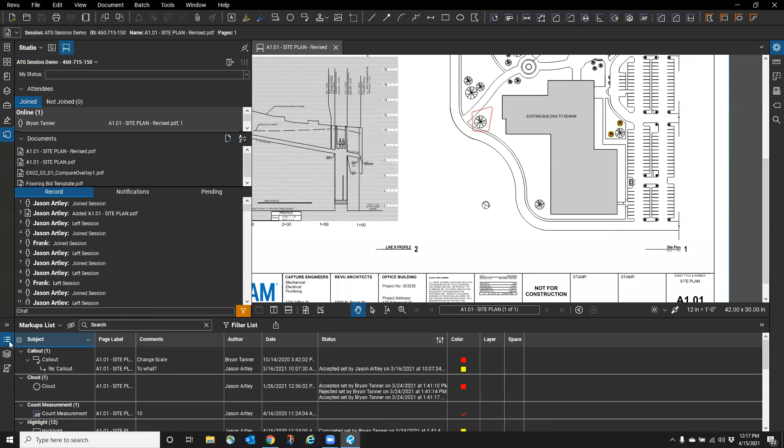For those that have been using Bluebeam for some time, they know that we store markups inside the PDF. That's one of the biggest selling points of Bluebeam in general. You open a PDF, you mark it up, you store it on the server. Somebody else opens up the same PDF on the server, they mark it up as well, and we get to approve and update all the statuses and changes throughout the lifespan of that PDF representation before the next phase of deliverables to our client. We may have a 30% PDF that got marked up, we make all the changes, we submit a 60% PDF, and then we go through another round of markups for that. So obviously that's one of the larger selling points of Bluebeam.

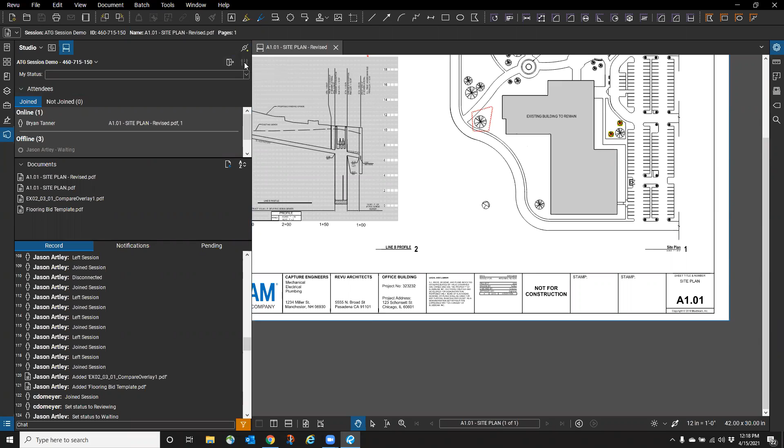We have those same options inside of Bluebeam Studio, but we also have this running record of actions inside the session. So that's just a quick intro to what we expect to see inside the studio session, the documents that have been uploaded, the record of activity inside of there. And if you're no longer participating in that studio session, we can just leave the session. Note that there's a setting right here, session settings, that is currently not highlighted in this ATG session demo because it has expired. Nobody can edit this any longer. I'm not the owner of it, so I can't modify or reopen this studio session.

I'm just a participant, so I'm going to leave the session. I'm out of it now, but I'm still inside of Bluebeam Studio. I'm still logged in. I can still participate in other sessions, and I'm going to add one and ask those following along to please join. So I'm going to click and create a new session. When I create the new session and we see the session code down here, I'm going to ask you to not create a new session, but click the plus sign and join a session.

So I'm going to create a new session. Give me just a moment to talk through what we do when we create a session, and then you'll be able to join it. I'm going to call this my ESD example session. I don't have any files open, but if I did have some PDFs open inside of Bluebeam, I would have the option of adding those files to the session I'm creating. Because I don't have any, I'm going to click the add button, and I've got a good expanded data set here.

That's actually a 3D file that I want to use, and there was a practice file from what Michael did last week. So I'm just adding a few files to this session. What files are uploaded to a session are the only files that the participants have the ability to access. The owner of the session can allow other people to add documents, but I'm going to leave that restricted. I'm going to say the documents that are loaded are the only documents that are available for markup. That's the only thing people have the ability to access while working in this session.

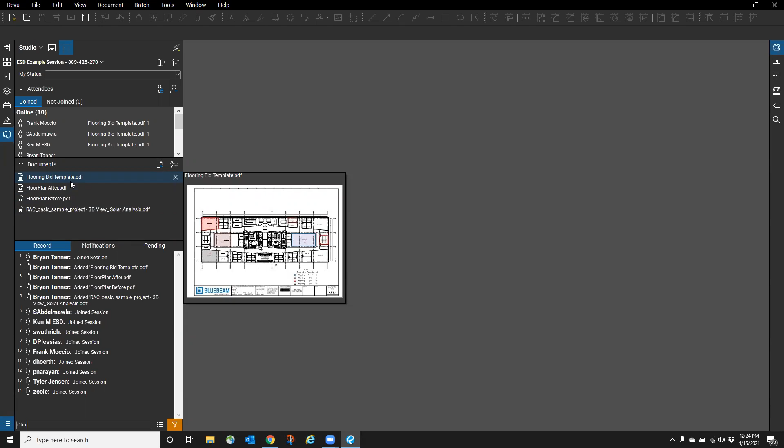One possibility is the unfortunate circumstance that somebody became ill and is out for a couple weeks, or leaves the organization and they were the administrator. You can still download a report, capture all the markups that took place as part of the session, and create a new session. The markup list is still retained, the records are still retained. So it would require a new session to be created with a new administrator, but I don't believe you can have multiple owners. We can set permissions so everybody else has administrative level permissions, but they would never be the ultimate owner of that information.

So we've got a few documents here. I know people are looking at a variety of those things and maybe even tinkering around with a couple markups—some moved images, some very basic stuff, and that's okay. Feel free to make some markups. I don't mind the markup list expanding a little bit while we go through this.

I did see a question about when I hover over a name in the record window, it only shows the detail box for about 1 second. Can I make that longer? I think if you keep your mouse completely still, you'll see that detail for a little bit longer. I'm literally letting go of my mouse to make sure there's not even the slightest change to what I'm touching when hovering over those.

Yeah, I tried that too, and it doesn't work. It's always been an issue. Every time I put my arrow on a name, it pops up for about half a second and it's gone. I'm like, oh, what time was he there? I can't tell. It's always been an issue of mine.

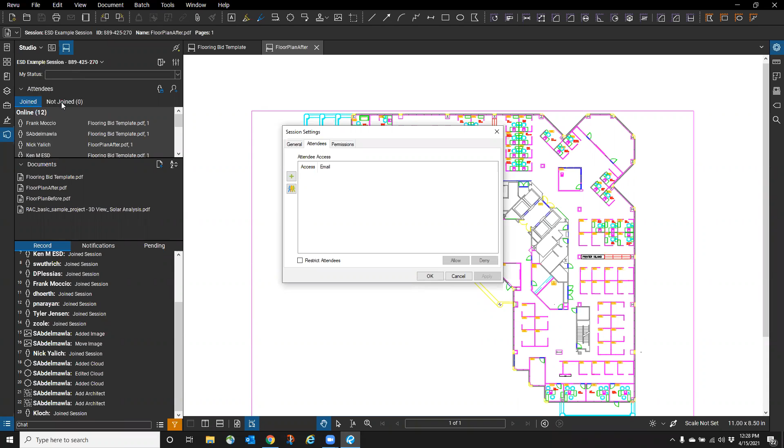But again, we can invite individual people via their email address, or invite groups of individuals—slightly different interface than when we initially created the session. This is the session settings after the session's been created. We can alter the permissions; all attendees or groups of attendees can be given different permissions within it. Again, I chose not to allow anybody to add additional documents.

I can give another attendee full control. So again, I'm still going to be the owner, still the host of the session. But if I left the company, as long as I assign somebody else full control, they have the ability to pull the reports, create the record documents, and do things of that nature as a basis of this.

So as long as one other person has this full control aspect, then you're effectively co-owners. It's just that obviously that other individual is not determined as an owner from the terminology standpoint of Bluebeam.

I'm going to go ahead and cancel out of there and not apply any of those changes. We'll look at some of the changes that may have been made. Add a rectangle. Note, whenever I click on somebody's markup or somebody's activity, it doesn't just allow me to get those details, but it'll take me right to the markup. Okay, so we've got the 3D model there.

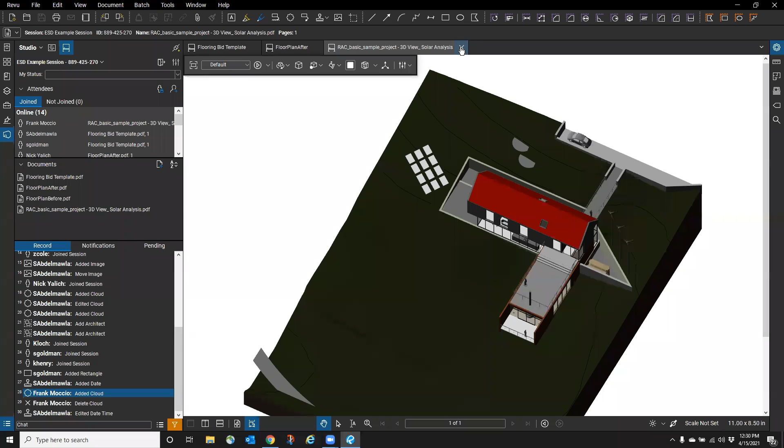I'm going to go ahead and close out of that. That's going to be the one file that I try to stay out of until I'm ready to go into it, because whenever we've got a 3D PDF, it can sometimes bog down our display drivers and things of that nature. I don't want to get into a slowdown while we're on the session today. That will tend to be the only PDF that I have open at a time if it's a 3D PDF, and we'll talk more about that later.

But we can jump directly to that markup. We don't have to open up the markups list. We don't have to figure out which PDF we should be looking at. Hey, if somebody added an architect, boom, I can go to that file. I know which file it is because it opened it right up. I can go to the markups list and find, oh, hey, there's the markup. I can actually right click and set the status to whether I accepted, rejected, or completed that task.

If we needed to add the architect to, maybe it was a title block piece of information that needed to be included as the person working on the project, maybe I added that architect, or maybe it was a note to the architect. And if I address that issue, I could right click and set the status to complete.

If I was the project manager and we had a phased approach to this, where anybody could make suggestions, anybody could make markups, but it required the project manager's seal of approval, basically, to say yes, we are accepting these changes, I could come through as the project manager and either right click and set status or double click. Either one works, and I can say that yes, this markup is accepted. Whoever's working on this project has my approval to actually work through to a level of completion.

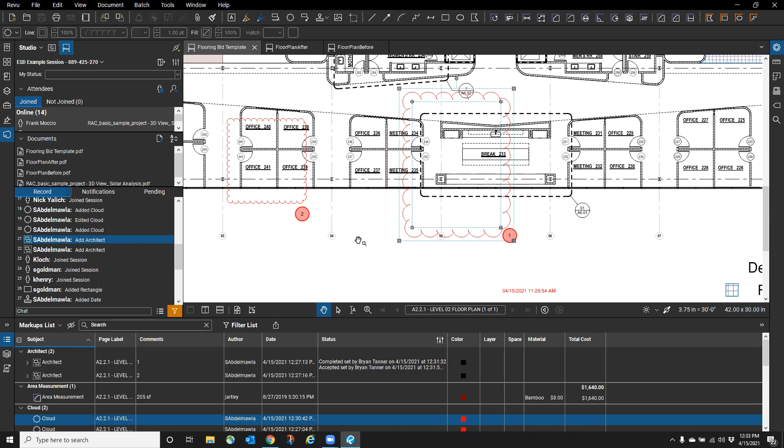With that same thing in mind, we've got the markup tools that each individual uses. Our client or our contractor may not have the same tools that we have, but as part of the ESD team or the profiles that we have loaded, we have our tool chests. And whatever you have stored in My Tools, or maybe you have a custom ESD tools panel within your tool chest, those are available to you in sessions, just like they are in regular old Bluebeam.

Now, will the other people, the clients and the contractors, have access to those markup tools? No, they'll have access to their own My Tools or their own personalized tool chest. The nice thing is, if a recent tool is used, it's saved. But note that other folks are using tools and markups within this document.

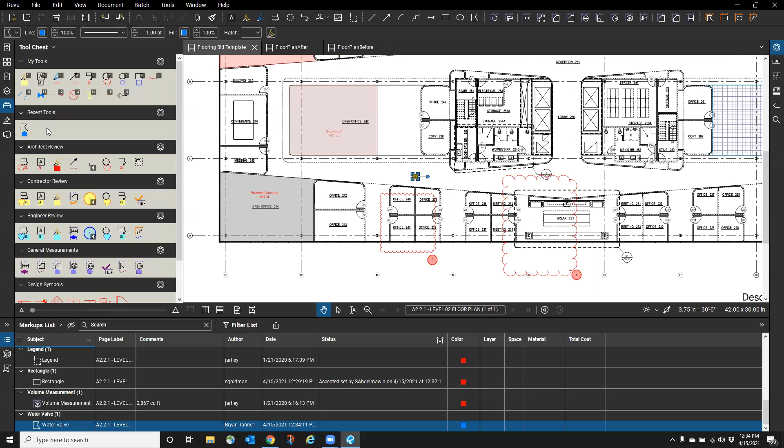It's going to be loaded as a recent tool for them, but it is not loaded as a recent tool for me. So your recent tools are your recent tools. Not only do you own the markup, but Bluebeam recognizes that it is your markup and it's your recent tool used. I wouldn't have any recent tools used until I placed one, and then it becomes my recent tool, and nobody else should see that in their own recent tools list.

Because I created that markup, I have the ability to delete it. And because I deleted it, it's gone, it's out of the markup list. So as the author of a markup, you have the ability to delete that markup, but you're the owner of it. Nobody else can manipulate it, nobody else can delete it. Once the markup is deleted, it is gone. Nobody else can change or accept or modify the status. It's gone from the markup list.

That said, once the session closes, nobody but the owner has the ability to pull a report, or the administrator, whoever has administrative access. Nobody else has the ability to make those changes. So once the session's closed, you can't go back and artificially delete your markup because you want to tell somebody, oh, I didn't mark that up. No, it's there. It's part of the session, it's saved. So if the markups were closed out at the end of the day, they're frozen in time effectively.

The only person who owns that document now is whoever created the session, or whoever they gave administrative privileges to. And even though they're the owner of the session and have administrative rights, they still don't have the ability to modify these markups. There is one singular exception to that.

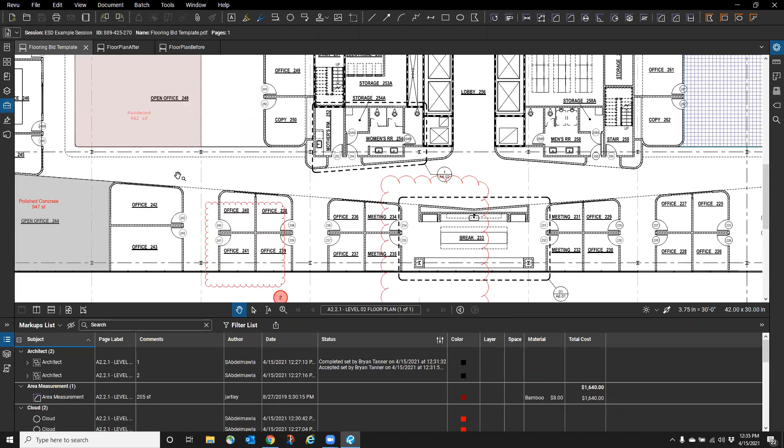I'm going to close my tool chest. I know you have an ESD shared tool chest as part of your profile. Fantastic, thanks for bringing that up, Samir.

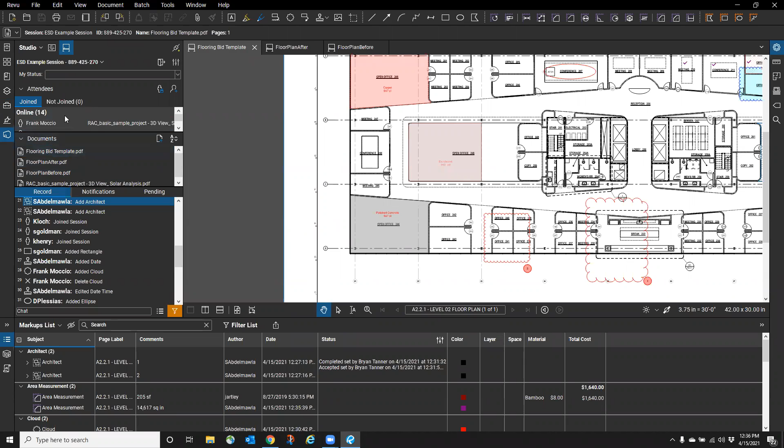But back in the studio session, let's say a disgruntled employee leaves or is let go, or somebody at a client's, their disgruntled employee is gone. You can, as the owner of a session, deny or remove that individual. If that individual owns any markups, then, if I denied somebody the ability to access and they owned markups, as the owner and host of the session, Bluebeam is going to prompt me to reassign their markups to somebody else.

I tell you that from an administrative standpoint, a data integrity standpoint, but I also ask that you don't game the system and use that to falsify who has created those markups at any point in time. That would be an overuse of power, or abuse of power, as the owner of the session to reassign things willy-nilly without other people who are still involved with the project knowing. So we do have some administrative privileges along those lines.

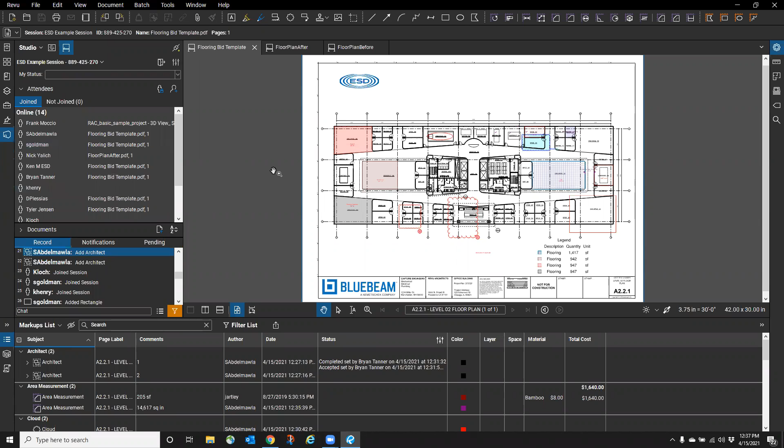If other folks are in the markup, we're in a Zoom session, but not everybody has Zoom, not everybody wants to use Zoom, not everybody wants to be live working within things. I can use the chat window and say, Tyler, please explain markup to move. And it's going to be a part of the chat session. That's taking an unusually long time to load, that's usually extremely quick. Maybe it's just because I'm streaming on Zoom, but under normal circumstances it should show up shortly. Oh, it's because I'm filtered, that's why. I'm going to jump to my filtering and include chat. So we can chat to folks and talk with each other while we're going through it.

Or again, maybe we're not on Zoom because we don't have the same time slot available to complete these markups. The benefit of Studio is we don't all have to be in the same room at the same time. We can give everybody involved in the project a window of opportunity, maybe a day, maybe a few days, maybe a week, to create their markups, and not just create the markup, but make a note in the chat session about why their markup was created and what it represented. We can go through and add a markup to their markup. I can't change this markup, but I could go to tools and create a call out and say, hey, please explain.

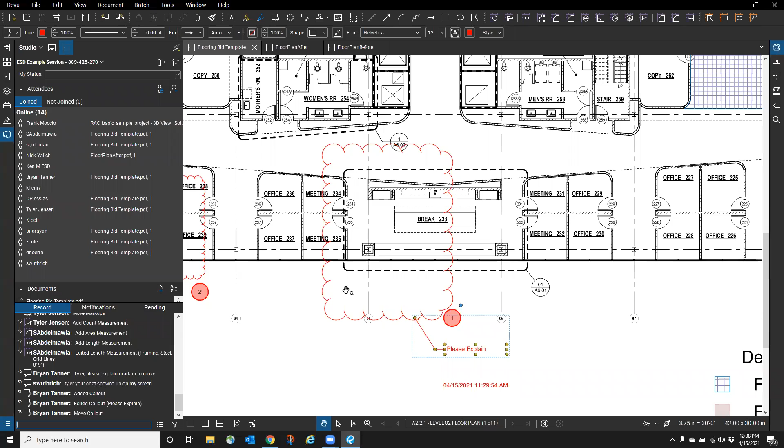And that's my markup to their markup. Maybe you have some standards around the process or workflow for that. But we can create communication using this method or through the method down here with the chat window. Now, again, we've got several abilities there with regard to these changes.

I am going to kind of take this a step further. We've got multiple documents loaded into this file, and multiple people making markups. I think most people are probably in the Flooring Bid Template. I'm going to jump over here and assume that nobody's made markups, or if there are, they're minimal at this point. Please keep it that way for a moment.

With both of these floor plans— Hey Bryan. Yes sir. One question about those, the chat and those internal markups. Like I could see us using this for internal collaboration and asking questions, chatting, but then wanting to send a cleaner finished version to a client. What's the best way to do that?

That's great, that's a great question. I was going to get to exporting a report later, but this really is a good opportunity based on your question to cover that. As the owner or administrator of a session, I can at any point in time create a report. Now the session is going to be open as long as the session is set to open or set to expire, but at any point in time while the session's live or after it's been expired, a report summary or a record summary can be created.

We can actually create an entire PDF package, summary, or combined files—a slightly different functionality between there. The PDF package is going to basically export all the files with their included markups in kind of an interesting PDF format. I'm just going to do it really quick so we can see that.

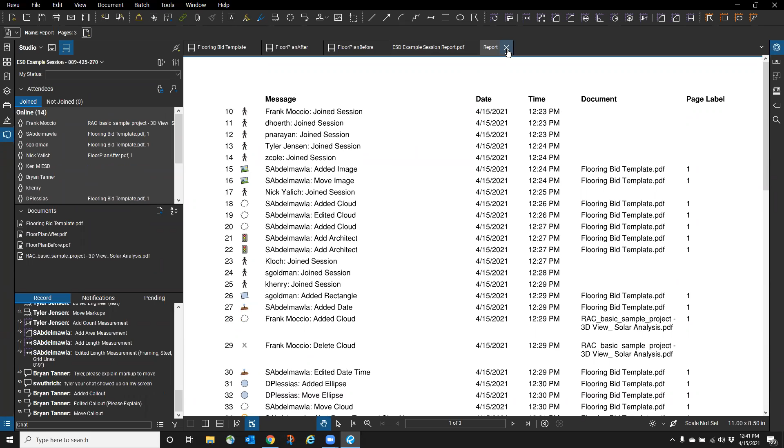And here's the report of all the comments, all the moves, all the other things. I can even—actually I didn't append it, I didn't choose that option—but normally I could have hyperlinked these markups to where it would actually take me to those changes and those markups in each individual drawing too. But I didn't choose that option in the previous dialogue.

But one of the options that we have when creating the report, whether we've got it filtered here within what we're viewing in the record, or while creating the report, I choose to remove—let's see here—include filtered items only. Actually that's a little bit more clarity. I should have filtered the chat out. I could go in here and say only include the filtered items.

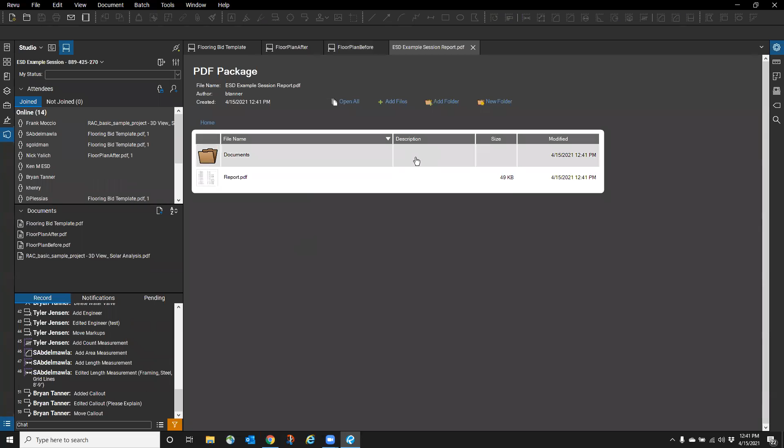Now, whenever I create the packaged report, I'll just overwrite the previous one—that's on my local drive or that gets saved to your server. And now the report's not going to include any of the chat information. So we have the ability to clean things up.

We cannot individually delete records, but if we know that maybe there was some kind of offhand conversation or internal conversation that we don't want the client to be privy to—maybe it was completely professional, but it was just internal communication that wasn't for the purposes of a client viewing, a contractor viewing, or potentially a competitor. Sometimes we're asked to collaborate by clients with our competitors on a shared project. There may be some intellectual property or detailed information that we just don't want our competitor to be privy to regarding our internal workflows.

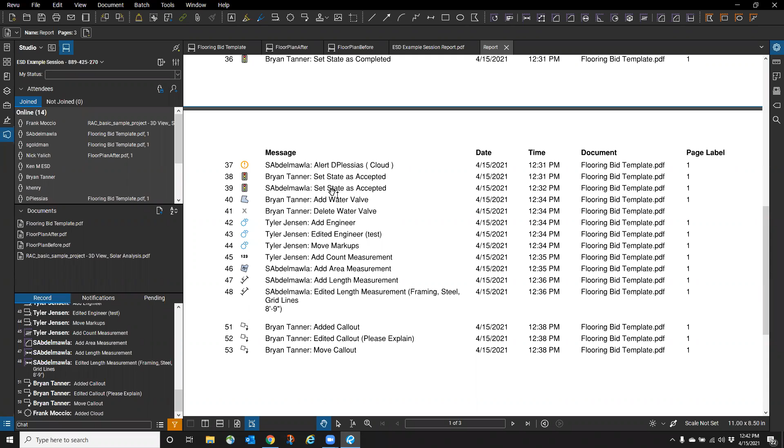So we have the ability to filter out that information as part of the report that's created. And then, I'll do that one last time, but using one of the other settings, we can just use the record summary individually. That's just that record report that we saw before, or we can use the combined files—I'll save that, override again, just for the sake of training. And here's that filtered information, just page one.

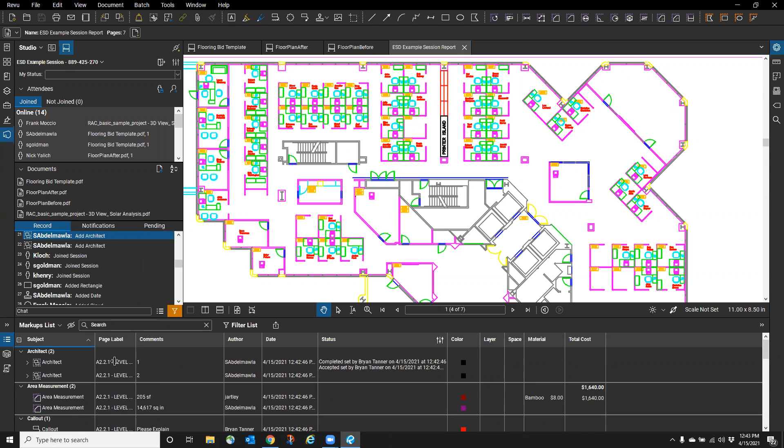And we can see there's the hyperlink because of the option I chose that time. It'll take me directly to that document or that part of the document. I could go back to page 1 and click a different link, and it's going to take me to that particular file and where that markup is. It may have been a fairly large markup to where it's not zooming in specifically to where that markup took place, but nevertheless, we have that hyperlink functionality. If it's a 100-page set, this becomes extremely helpful for finding where those markups took place. But once we've got the file open, we can see that list of markups embedded in the PDF still, and we can still accept, deny, complete our statuses for those markups.

Great question, Tyler, thanks for that. Definitely one of the more critical aspects of using this tool is creating a report after the fact, because what actually does happen - and I've got this information saved - this is critical to know for anybody who's creating a session or hosting a session: a finished session will have all the files removed after 120 days.

This is cloud hosted, but it's assumed because Bluebeam is a paid for product, and we're using maybe even a maintenance license of it, that it's getting continuously updated. But as you can imagine, there are massive petabytes of data being served onto this cloud by all users across the United States and North America of Bluebeam.

So after 120 days of a session being finished, the files in the session will be completely removed from Bluebeam servers. An inactive session, meaning you never set an expiration, has a little bit longer before the files are deleted. Bluebeam's just giving you the benefit of the doubt that maybe it's still an active project, but nobody's edited it in a while. So an expired session and a finished session versus an inactive one - the files will eventually get removed.

That's an important aspect to know, that we do need to pull a report and export those files to either our server location or our local drive that we're hosting these PDFs at, at the end of a session. And again, everybody's markups are embedded in there - they're the owner of those markups. And we have the ability to potentially re-upload those PDFs or those packages back up to a new session to kind of start back over.

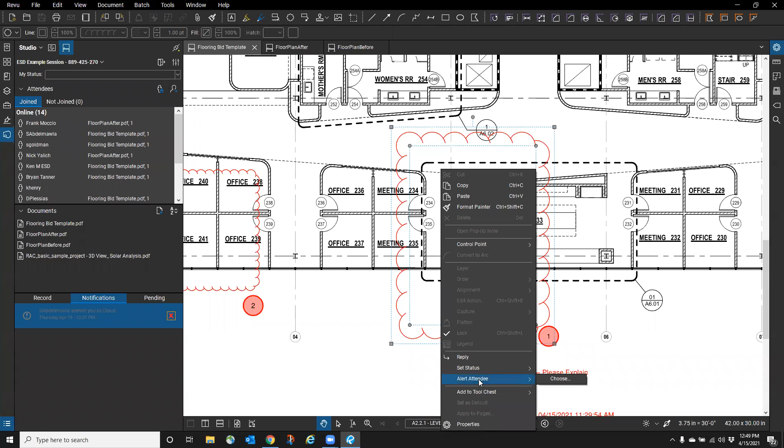I got an alert, I believe that was from Samir, that there was a cloud markup. I can jump to that note based on the markup that was made, and we can embed those notifications inside, so we can alert attendees to markups that have been made. We can select any of our markups, right click, and choose who we want to be alerted to a particular markup - not just email notifications that a session is ending, but a particular markup they need to pay attention to, which is a fantastic tool.

But the notifications themselves, I would actually have to get completely out, I believe. I don't want to get out of the session again, but I can change what those notifications are, or I could create another session and determine who's going to be notified, at what frequency, whenever we get out or whenever a session is approaching its end.

Before we get too far ahead, I know you've got your own tool chest, your own tools. The snapshot utility still works inside of sessions - it's going to get added to your recent tools list, and you can always add it to your My Tools. It's available inside and outside of a studio session.

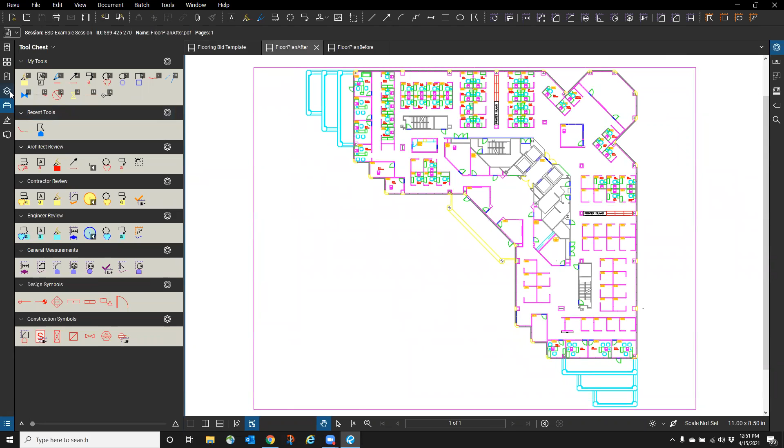We can overlay PDFs, that's what I was getting to a little bit earlier. The big difference working within Studio versus regular Bluebeam outside a session is, when you go to document and compare documents or overlay pages to compare changes, you don't have to have those files open in regular Bluebeam. But specifically inside a session, talking about PDF files that are part of this session, in order to compare documents, either using the overlay tool or compare side-by-side tool, we need to not only have those documents uploaded as part of our session, but also open currently.

So while those documents are open, I've got before and after open. I can go to document and compare documents side by side. I can choose which ones I want to compare currently. Note that I've got a fourth document as part of my session, but I don't have it open, so it's not available from this list. So I'm going to compare the before and the after.

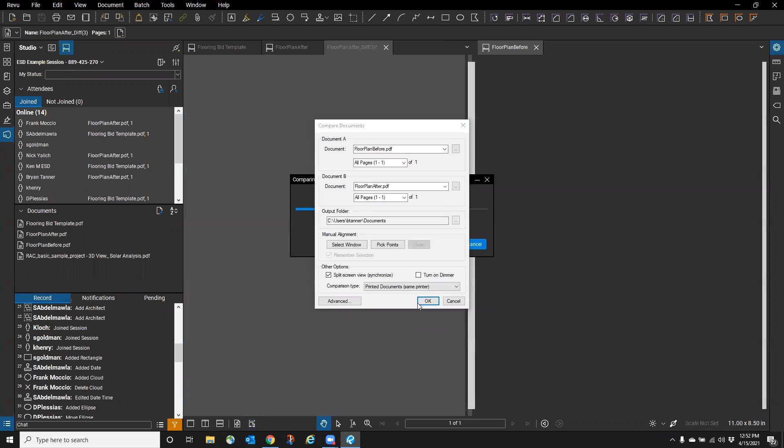I'm going to do the split screen view and say okay. As I zoom in on one view and look at a markup, it's going to synchronize and zoom me in on the other view. So even though I'm in a session, I can still use these compare tools and synchronize tools between the PDFs inside of Studio.

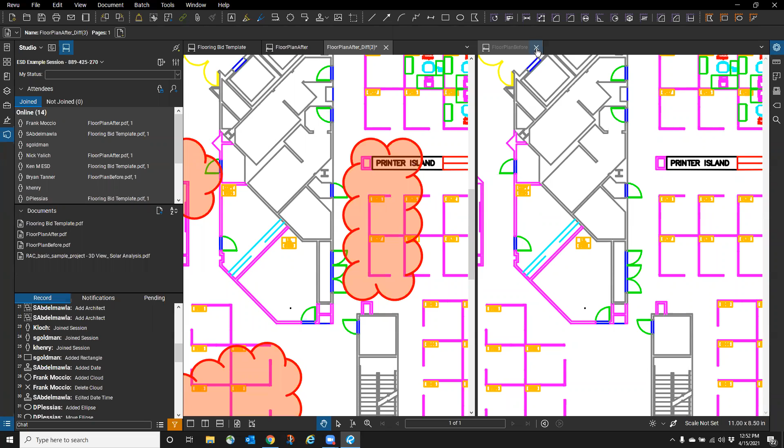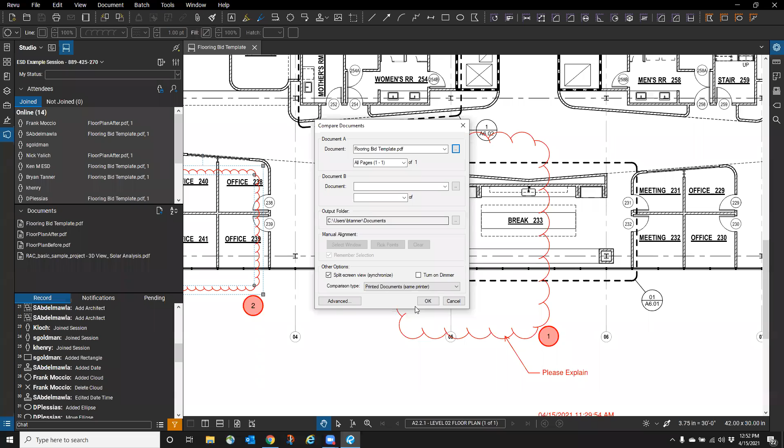That's sometimes not realized, because most people don't realize they have to have those documents open. Most of the time the assumption is, well, I want to compare documents, and they don't see it available. They don't want to open new files from outside the studio session, they want to work with files already in the session. But those files aren't available from your file menu anymore because they're part of the cloud, already uploaded to Studio. So they don't know that compare documents is a capable option. You just have to have them open.

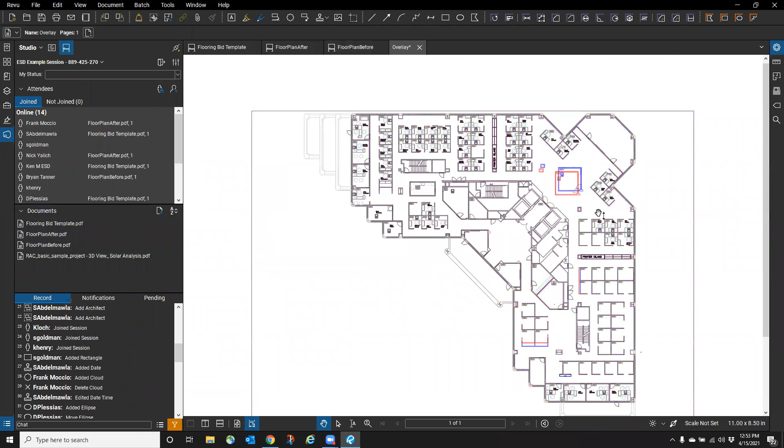The same thing goes for our overlay pages option. I want to add all my open files, but then remove my bid template because that's irrelevant, so I'm going to remove that. I can change the color coding between the before and after, and say okay. Again, it was only able to do this because I had both PDFs that were part of the session open currently when I went to the overlay options, and I can see the changes that have been made. Because this is a new file, this overlay is a merged file between those two.

This overlay is not actually part of my session until or unless I save this file and upload it as the owner or an administrator with the privileges to add a file. This is not going to be part of the session, it's going to be saved locally. And because it's a new document, none of you have access to it right now, and there are no markups within this file.

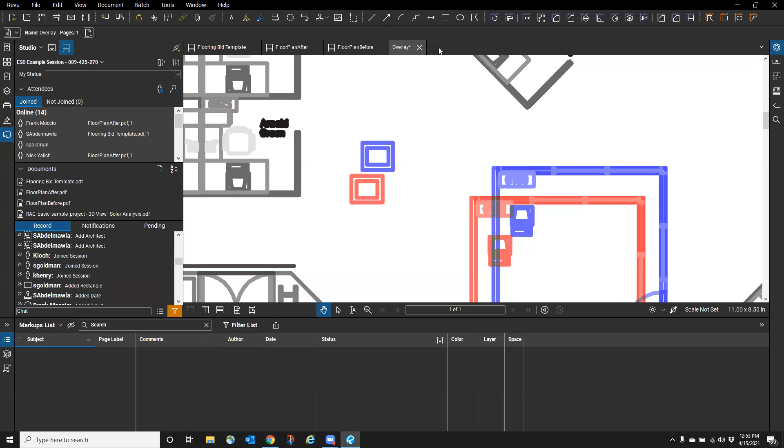So one of the few things we wanted to cover today, we got to notifications, we talked about exporting the reports, we talked about filtering the report information, which I think is really critical, that side conversations or internal dialogue can be filtered out of the report that's created.

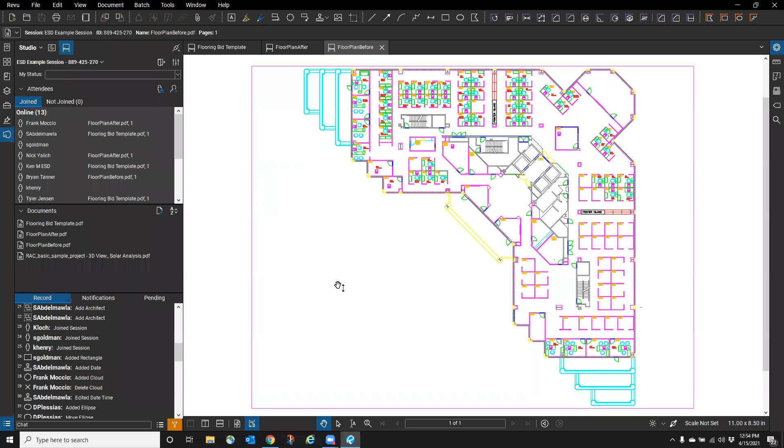I think we've covered like 99% of the information we wanted to today, but a couple things I really wanted to still detail is changing markups. So I'm going to go back to our flooring bid template. This file is already part of our studio session. And I believe you have a workflow for changing the status and changing the color coding of markups once their status has been changed. There are two methods for working within that.

We can just use the filter options, and we can change the filter options to create a new one. Actually, this one's saved because I used it on my system in a previous training. So the only thing that was marked complete is the only thing highlighted in blue, or whatever its original color was, and everything else is grayed out. Why is that an option? Because I created this filter in a previous session. You may not see this right now because you did not create this filter before getting into Studio.

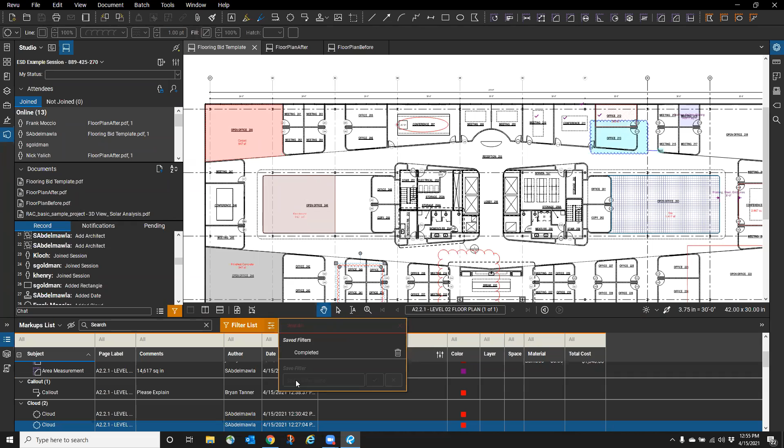So I'm not going to delete that, I'm just going to get out and clear my filter. But note that I can't create new filters right now - you can't do that within the studio session. Even creating new statuses or setting status properties, I don't have a manage option within my list for this.

We have the ability to create those filters, we have the ability to change the style of our status options, but we just can't do it inside of Studio. The reason being is because, yes, you have a paid version of Studio, but not everybody using your Studio session necessarily has a paid version of Bluebeam. Those who have an expired 30-day trial and are using just the free viewer - Bluebeam unfortunately does limit a couple features inside of Studio because those are advanced high-level features they don't want people to exploit through a free version of the software. So unfortunately it affects all of us, but it protects their intellectual property and their pricing structure.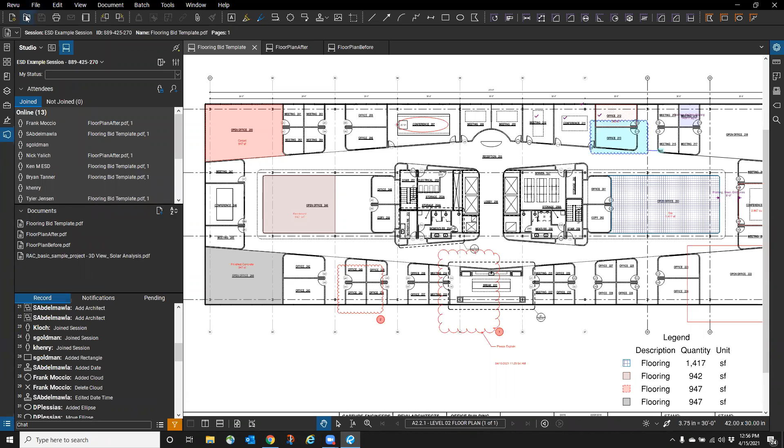So what I'll do temporarily is open up a duplicate version of this bid template. I know not everybody's marked this up and it's not part of the session, but what I can do before I ever bring it into the session is go through and manage the status.

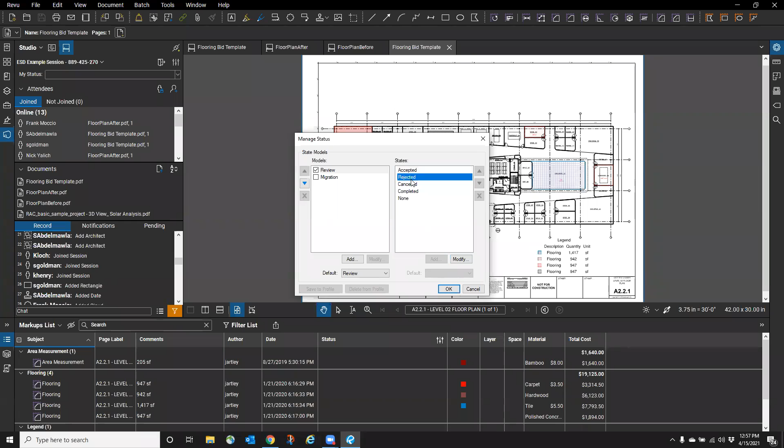I can say if something's been completed, and I'm going to apply a color, it's going to be green. Anything that's been completed, I can apply some other modifiers or descriptors to that. Anything that's been accepted and needs to be addressed, that's going to be yellow.

Anything that has been rejected, I can set it to a color status of red. So I can add those filters into here. And as I make the changes, note that I'm not in Studio right now. I accept that. If I go to one of these flooring markups and change my status to completed, we can see that the markup changes. That's great, that's what we expect in normal Bluebeam. I'm going to undo that.

I'm going to add this file to our Bluebeam session. Let me minimize the markups. I'm going to do a quick save as, actually, I'll just save over it. It's fine, I've got a duplicate version of this project set. I'm going to upload and add a new file, flooring bid template. I may change the name of it really quick. I'm going to close out of it here because I want to make sure we keep it separate, so we don't get confused over which one is which inside the Bluebeam session. But I'll go ahead and open that.

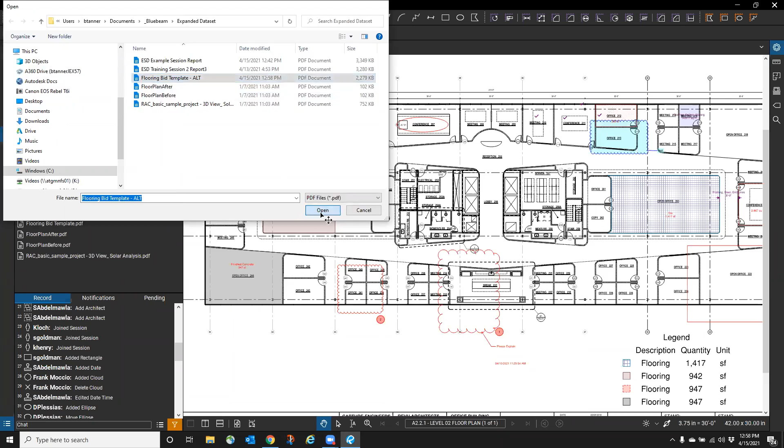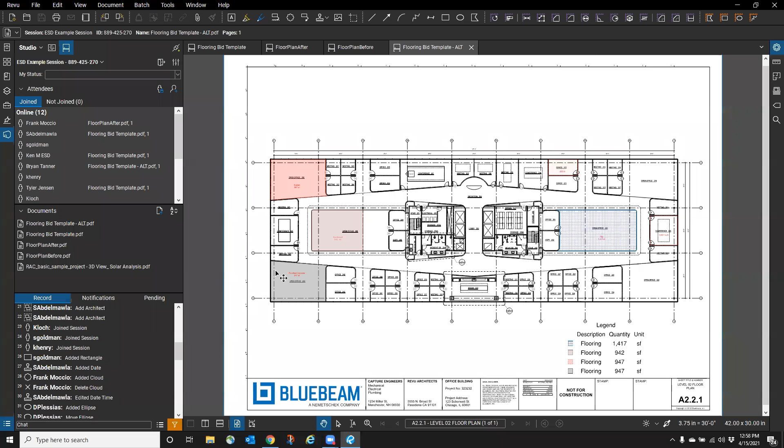Give it a second, it should have been much quicker. Come on, there it is. Okay, so there's our version of the file inside the session. Everybody else should be able to access this now. Because it's part of the session, it may take just a second to stream and make it available to everybody else.

But now that I'm in the session, if I set this to complete, don't make a liar out of me. It's going to make a liar out of me. We should have had that session and markup update. Oh, there it goes, okay, there we go, it just took a second to apply. It scared me there for a second.

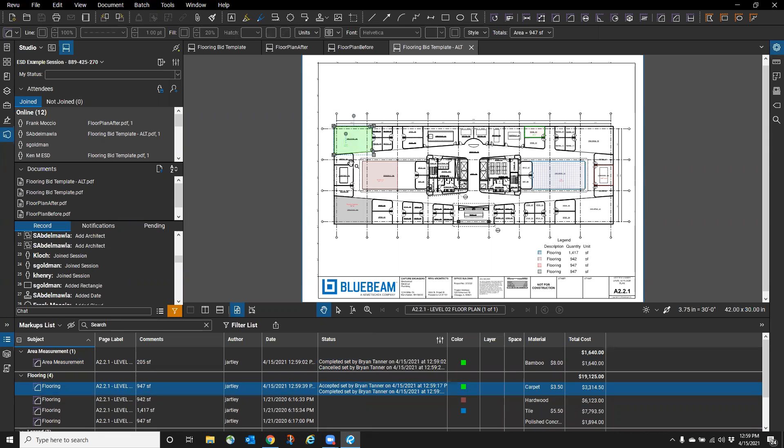And it's going to be somewhat dependent. I was just looking at the wrong area, that's what my problem was. I was looking at a different markup, the one that was set up there. So as the statuses change and it becomes completed, now we're going to see the most recent status reflected in the color coding of that markup. There we go, I was inadvertently changing over here.

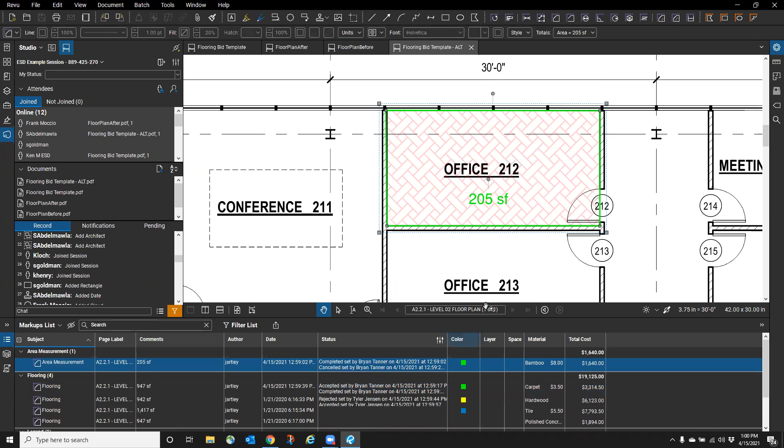The one limitation, and the reason it didn't stand out to me when I changed the area measurement to completed or even canceled, is hatches. Hatches do not update with status color coding, so keep that in mind. That is one limitation of our status changes: a hatch pattern as defined inside Bluebeam does not update. Now, an overall hatched area, solid, yes, but a hatch pattern does not.

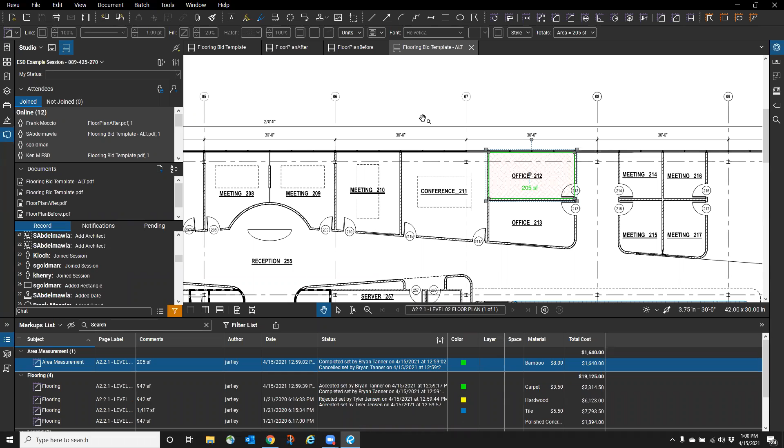And then, before we open it up for general conversation and questions, I know we're at the top of the hour, so I apologize if we've gone a little long, but I encouraged questions throughout. I'm going to close out of the subsequent files because I am going to get into that 3D PDF. This would traditionally be something created inside Revit or similar software that can produce a 3D PDF. We can change the view mode and view style of this 3D PDF.

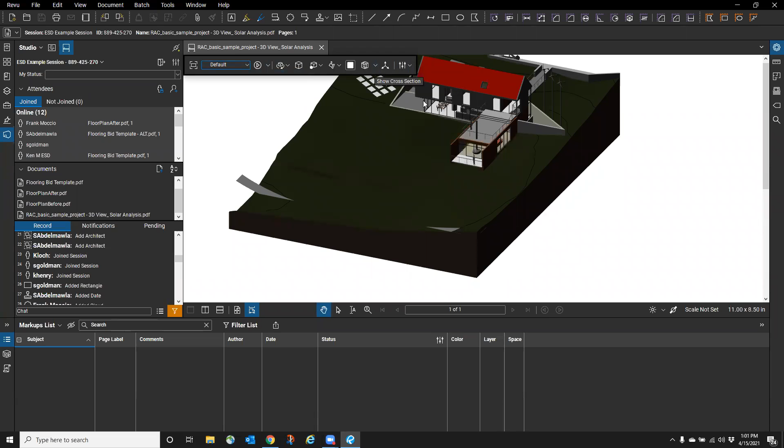We can change the markup. We can change the actual, there's some saved display states, but we can change whether we're seeing it in wireframe or in a cross-section view. So I can set a cross-section view, or move that cross-section view as well. We have the ability to make those adjustments, but what's really critical, let me move that back, is whatever information was coded into the 3D Revit file or wherever it came from, the object data.

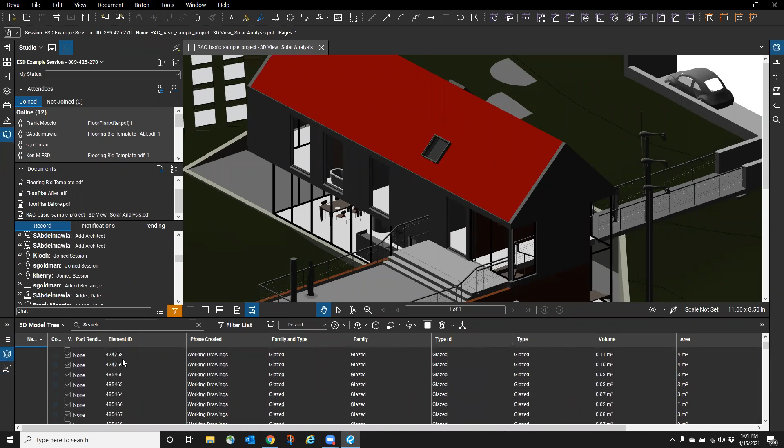If we go to the 3D cube that's down by our markups list, we can actually see all the structured data that's inside that 3D PDF. And if we select that data object, we're actually going to get it highlighted and shown in here. That was just a wall panel that didn't have much data assigned to it. Precast stair, we can see that information. If we needed custom columns added to the PDF, we could do that before we ever upload it as part of Bluebeam, and add those additional details.

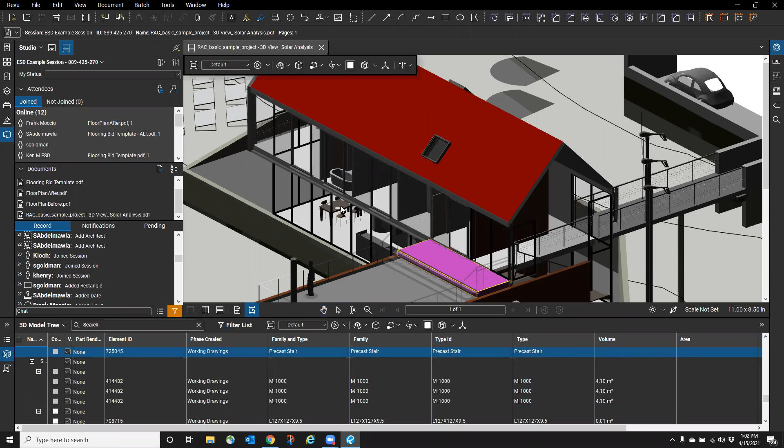Maybe it's a cost structure, maybe it's a timeline, but we have the ability to filter down data as part of our 3D PDF and change our cross-sectional views and things of that nature. Again, what functionality does this provide to you?

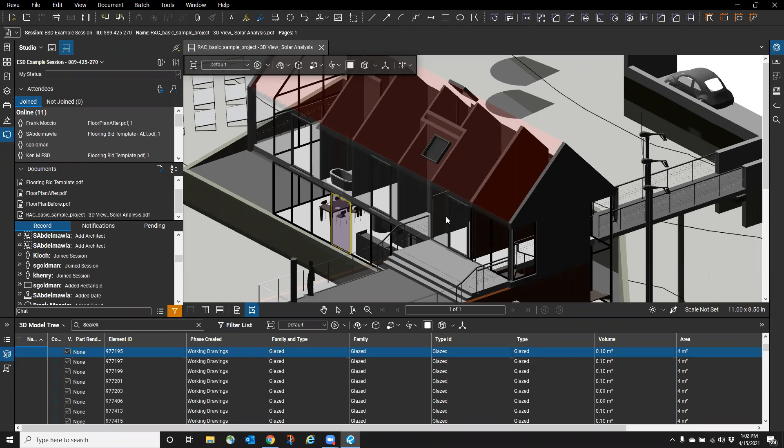It depends on what your use case scenario is and the kind of client you're collaborating with. BIM 360, or the Autodesk collaboration cloud, whatever they're calling it these days, does take on some of this load. If we're using Revit, if we have Revit spaces uploaded to BIM 360 and we're collaborating that way, then go ahead and collaborate that way. But if we have a client that doesn't want to use that platform, one you've done a lot of work with, that is already familiar with Bluebeam Revu and with studio sessions, this is a perfectly applicable way to allow markups and to allow exploration and discovery of the details inside the 3D PDF and the structured data from that model as well.

Okay, I think I've covered everything that we needed to cover today. We're a few minutes over, but I'd like to invite anybody with questions over the next few minutes to go ahead and pipe up and ask them now. Use the chat, unmute yourself and ask it. And if you want to stump me, try to stump me, that's fine. If I don't have an answer for you, I can always get back in touch with you at a later date and follow up with an answer. But fire away, and if we don't hear anything after a couple minutes, then we'll go ahead and depart.

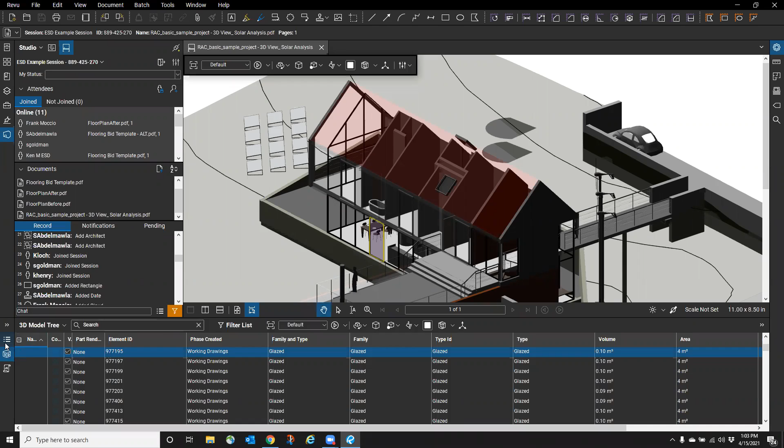Can you show again how you exported that record session? Yeah, absolutely. So as the owner of the session or administrator, if we have either of those privileges, we should at any point in time be able to export a report. You have to be the owner or administrator. Yeah, so that's one thing — that's probably why you couldn't find it.

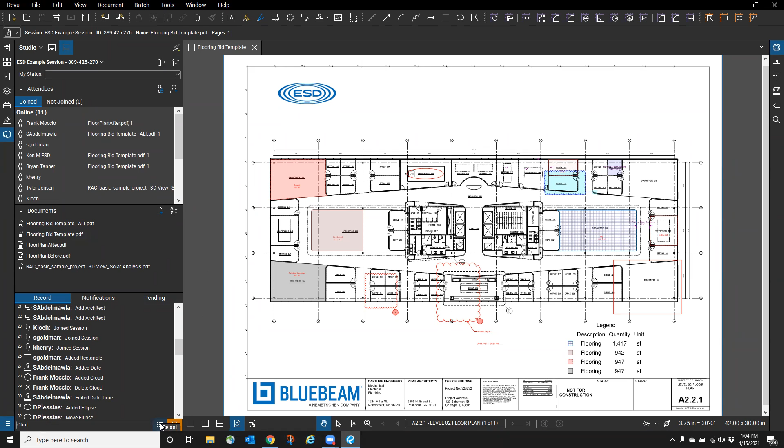Yeah, so I've got an icon there that probably nobody else has right now, but I can either do the record summary itself — that's just the report of the log within the record — or I can do combined files, which creates one single standard PDF, maybe 5, 6, or 7 pages in this case. That has the record report plus whatever individual PDF files are in here. And these don't have to be individual single sheet PDFs — any of these PDFs uploaded here could be an 80 sheet set, and we can still mark it up and combine those files into the report.

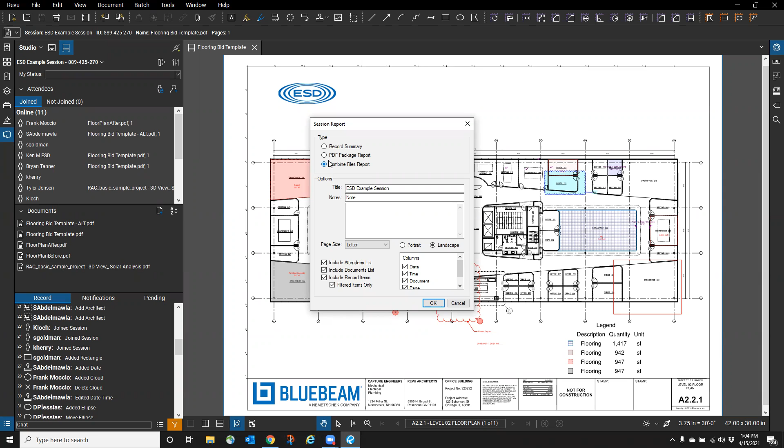Or the PDF package report is really the all-of-the-above example, where we have that structured data. We can go to the report, or we can just go to the individual documents and view the markups there as well. Great question again, though. But that is a limitation of having those administrative privileges.